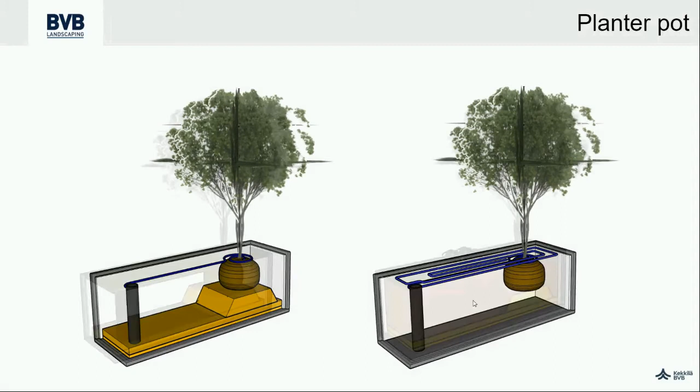Here is another picture. Then you can see how we build the rest of the substrates. The dark brown on the upper side is a mulch layer, and below it's mainly an easy drain substrate with a lot of nutrition in it.

At first we had some troubles with the mulch layer because of the wind. The mulch was blowing, not very much in the beginning, but when it dried out, the mulch was blowing away.

So we came up with two ideas. First, to glue it a bit together, so we delivered a spray that is like glue, and it will keep the mulch together. It's very easy and fast to keep it there, but there is an issue that it will be gone in a couple of months, and the shrubs won't be growing that fast to keep the mulch together, because eventually the shrubs will be big enough that the wind doesn't get a hold of the mulch.

And we also added sprinklers to keep the mulch a bit wet, because if the mulch is wet, it won't blow away that easily.

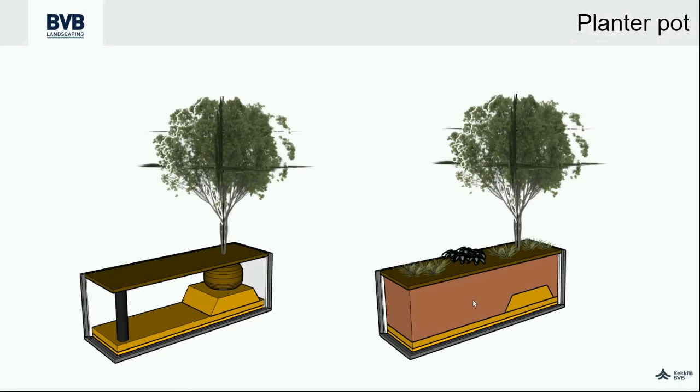We also did a lot of testing, because in 2018, when Martijn first asked me to join the team, we came up with an idea to have 2 pots, like you see in the picture, for testing. Those are 2 concrete pots similar to the pots that are on the building right now. And we tested everything from nutrition to irrigation, to the perennials and the sensors that we had. We tested everything, and we came up with a lot of issues.

At first, the trees were stress tested as well, to check if the trees could handle a lot of water, or a little bit of water in this substrate, because it's the combination of substrate and tree. And we saw that the biggest problem was too much water and not too little water.

So we had 2 test rounds. The first one, we stress tested it so much that the trees almost died. So the second year we planted 2 new trees and stress tested it a little bit less hard, and we came up with a small change in the substrate to give it even more pores than it had before. That made sure there was no drying out, but also no air pushed out by the water.

We tested the nutrition as well, because you want to have a steady amount of nutrition, since there's only 4 cubic meters of substrate per planter. That means the nutrition will slowly decrease, but decrease much harder and much faster than in the normal natural environment.

So we added the liquid fertilization, and we tested if the pH and EC, electrical conductivity, those first 2, could be kept stable. Because if you add water, mainly the pH will go higher.

You can see it in measurement 2. It's in Dutch. You can see the pH is the first line, and you can see that it goes higher. You can also see that the EC, the electrical conductivity, which is the amount of nutrition in the planter, is going lower.

The only thing you don't see in this part is the nutrition tank, because when the picture was taken it was not finished yet. The nutrition tank is not there in the picture, but it's there right now.

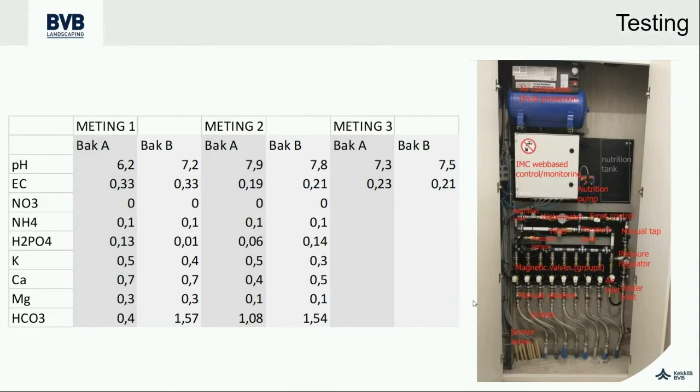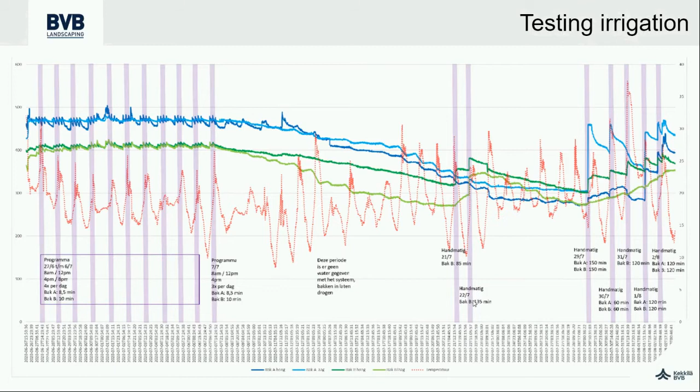We tested irrigation as well, stress testing it with too much water and too little water, then calibrated the substrate on the sensors. Sometimes we had issues with sensors because it's a very open substrate with a lot of pores. That means if you're irrigating and there's a water stream going past the sensor, you get a lot of water in the measurement, but it's not actually in the pot. So we're now using about 120 sensors, and we don't check every individual sensor, but we check the base of all the sensors on all the sides and facades to make sure the average is normal, because that's the only way you can measure this product and material by average.

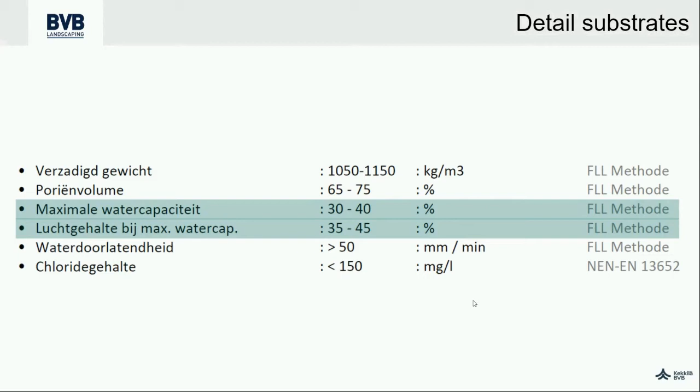Some details of the substrate. You can see on the left the two greens. The first is the maximum water capacity, and the second is the air capacity when there is maximum water capacity. That says a lot about how much air is in the pot, the plant, or the substrate when there is a lot of water in it. That's really the substrate you need for these kinds of situations with irrigation and nutrition.

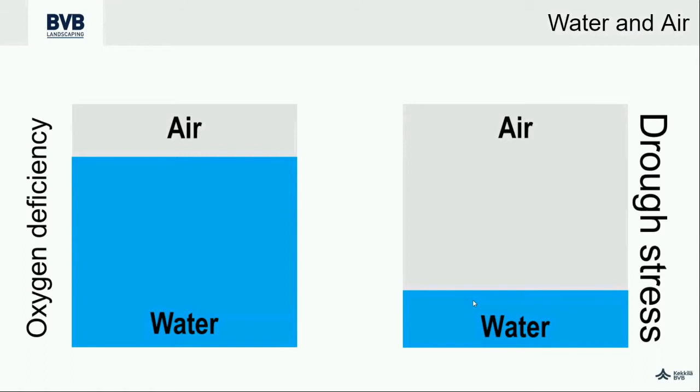It's the same with a tree. You can see here that less water is less problematic than too much water. So that's something we prevented in the substrate as well.

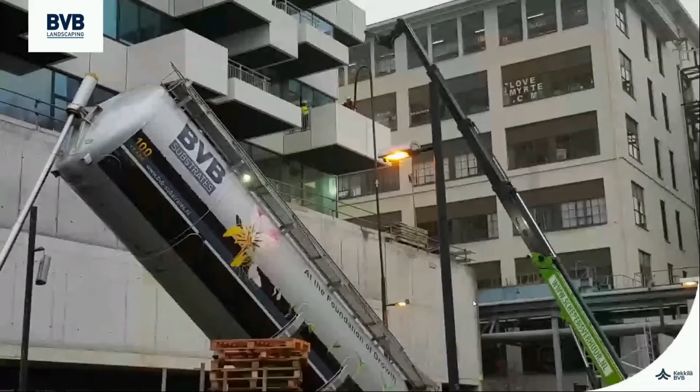We can tell you that we had a storm last week, about 1.5 weeks ago, storm Eunice. It had winds of 125 kilometers an hour. So how many trees fell down? How many trees had problems, Martijn? Zero, nothing. I knew the answer as well, of course. We're very happy with that, because if you have 125 kilometer an hour winds on a tower with 17 levels, and there's no tree damage, nothing, and it's only been there 1.5 years, then we are very happy. It's a combination of a couple of things, of course, why it works, but we're very happy to tell you that. My last two slides before Martijn takes over are about the perennials, about the vegetation.

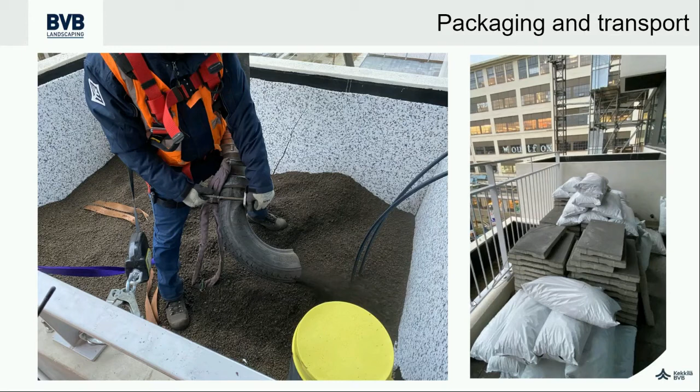We delivered most of the substrate by blowing truck. It looks like this: someone is in the pot and the substrate is blown up. On the right side, you can see a bit of packaging, 20-liter bags, because the substrate in the bottom of the planter was delivered by bags, since in a building like this the crane that delivers goods to the facades is a big issue.

It's not always available, because the whole building needs to be built, not only the trees need to be there - they're the most important, of course, but not everybody thinks like that. So we first delivered the substrate by bag, and then after that by blowing truck, and it worked great. The last two levels were done by big bag, because the blow truck isn't able to reach as high as that.

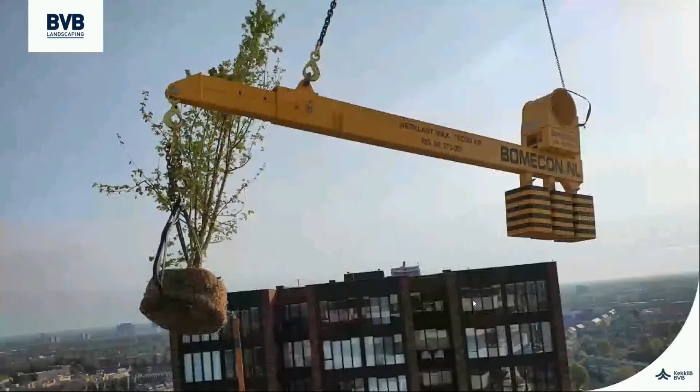Planting - Martijn made sure that all the trees are in the right spot and safely secured. How did that work for you, Martijn? Yeah, it was a difficult operation. In total we planted 135 trees, and we used a Bomecon - it's an arm, because the balconies above stand out 3 meters. So we use these devices to plant the trees within the facade.

At first it was a little difficult, because for us it was also the very first time planting trees that high up in a building. If you look on the right, there's a little propeller on it, and that gave us the opportunity to make small adjustments if a tree needed to go 5 meters to the left or 60 centimeters to the right. So it was very handy equipment to use, and that's how we planted all the trees on the tower.

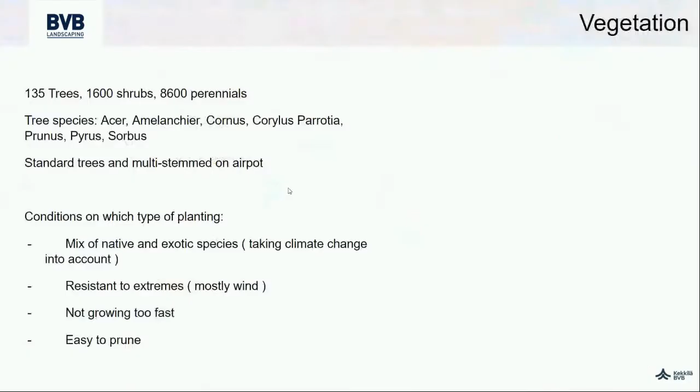If you look at the vegetation, as indicated, there were a total of 135 trees, 1,600 shrubs, and 8,600 perennials.

Different types of trees have been planted on the tower, such as Acer. We all use the Latin names, so I'll give you the English names too. Acer is maple. Amelanchier is the currant tree. Cornus is dogwood. Corylus is hazel. Parrotia is ironwood. Prunus and Pyrus are both ornamental, cherry and ornamental pear. And Sorbus is Rowan.

Some trees are planted as a standard tree, as you see in the picture, just like one single stem. But we also planted different multi-stems, with 2 or 3 different kinds of branches coming out.

For the choice of species and type of tree, we looked at the following aspects. We did a mix of native and exotic species, and we also looked at the ornamental value of the trees, but also at the changes of climate, taking into account that things are getting warmer in Holland too, with more extremes. We also looked at the future, at what is going to happen.

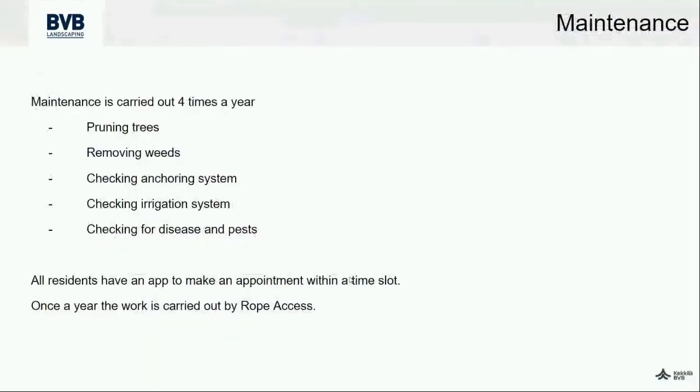Maintenance of the Trudo Tower is carried out 4 times a year, and the following activities must be carried out, such as pruning trees, both maintenance pruning and guidance pruning. There's a main difference: with maintenance, you only do the small branches or leaves, while guidance is the big pruning where you can remove some bigger parts of the tree.

Other tasks include removing weeds, and checking the tree anchorage, both the upper ground and the underground system. Underground you already saw in the pictures with the belts, and above ground there's a small nylon cable attached to the tree, so if branches fall off the tower, they don't fall down but stay at the pot. We also check the irrigation system for damage or blockage, and check for diseases and pests.

A little bit special at the Trudo Tower, residents use an app where they can arrange everything and ask questions to all kinds of suppliers such as us. This also applies to planning the green maintenance. A time slot has been set within the apartments where residents can make an appointment for a period of about 3 weeks, and daily we print a list of which residents or addresses made an appointment, and our colleagues go do the maintenance there.

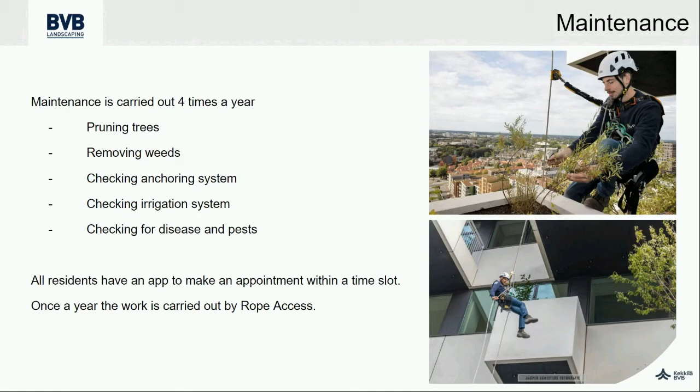Once a year, the work is also carried out by rope access, where we literally abseil along the facade. Our employees had to follow special training for this, in accordance with the guidelines of IRATA, so they are now fully trained and able to work in these circumstances.

So we cooperated with some companies to train pruners, because it's easier to train pruners to learn to climb than to train climbers to learn to prune — pruning is not that easy to learn.

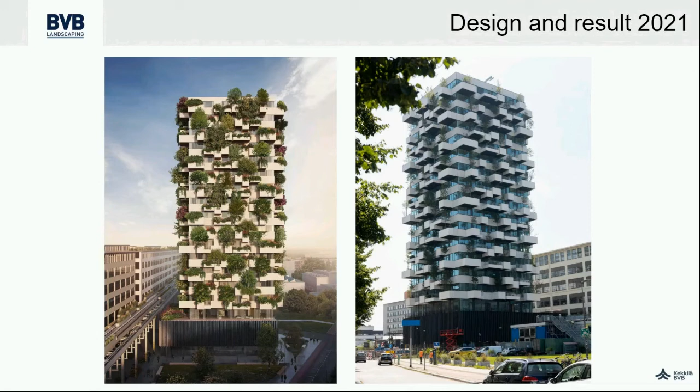On the left side is the image, an artist's impression, and on the right side is the actual building. I think 2 days after, the trees were planted. So the design and the result, in 2021. It's there, and it came through its first storm, so we're very happy with that.

Martijn, we also have some questions. How deep is the planter, for which size of trees? Well, the planter is 1 meter 10 in total — we have 10 centimeters of solid lava, as Jana also said, and then we have a meter of substrate.

In total, 1 meter 10. How big are the trees? The difference is between 4 and 6 meters.

And the same question, not the same question, but from the same person: what is the advantage of the air pot? It was possible for us to plant the trees all year round. So what I said was, it's no problem for us to plant them in spring, summer, or fall.

In Holland we only have a period where, if you have a normal root ball in the standard size, our planting season is between November and March or April. So it's a small window of 4 or 5 months to plant all the trees. But the Trudo Tower was finished in September 2020, and the last trees were planted in June, July.